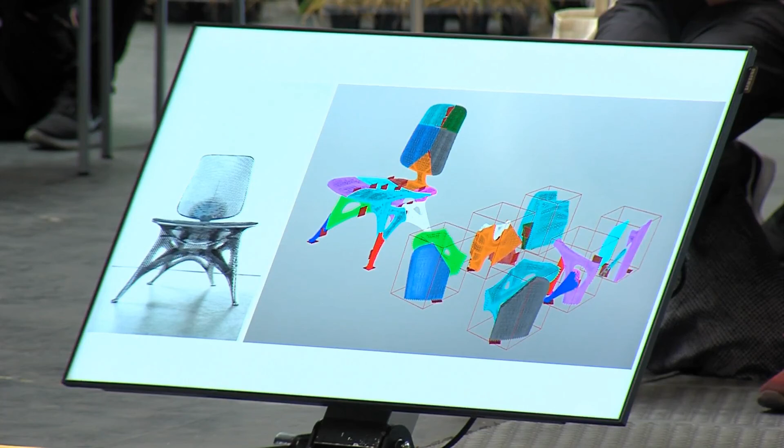And since we didn't find any 3D printing company that would help us develop a 3D printer big enough to print full-size furniture, we decided to take matters into our own hands. We bought an old retired robot from the car industry, and together with two students from university, we developed this machine. It's using a two-component, really fast curing resin to print lines almost in mid-air.

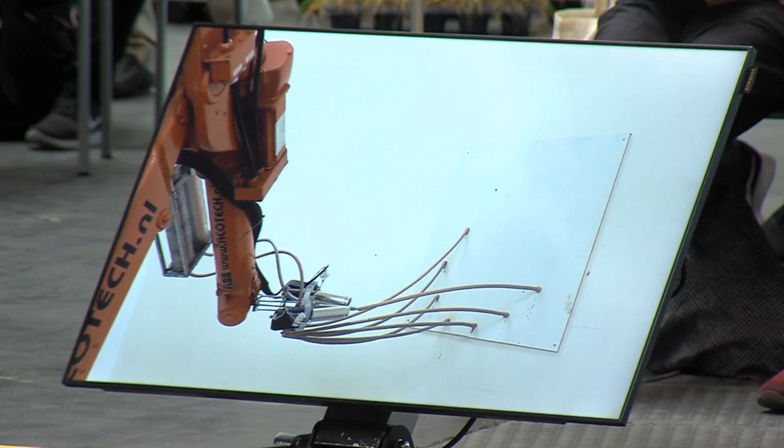We kind of liked this idea because you use six axes rather than the normal three axes of a printer, and this allows you to not just print inside a building volume, but also move outside of it and print parts and pieces of virtually unlimited size. Because if you're reaching the end of your building reach, you just move the robot and you can keep on printing.

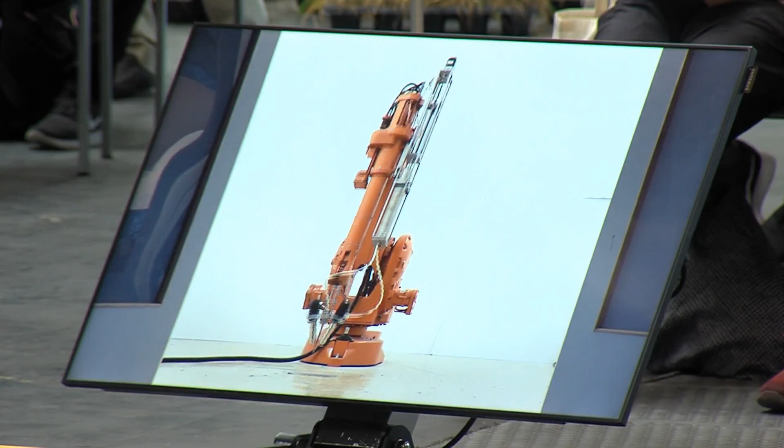However, this material wasn't really what we wanted. It's a really lightweight, brittle, not appealing material. So we thought, what if we would do the same with metal? What if we take a welding machine and attach that to the robot and start printing with this? Then suddenly we can make full-size steel objects.

Brilliant idea, we thought. We were dreaming about early retirement, but unfortunately we found this patent from 1925 of a guy who did exactly the same, using a welding technique to make decorative articles. But luckily he didn't have robots at the time and he didn't have a computer, so there was more than enough left for us to develop.

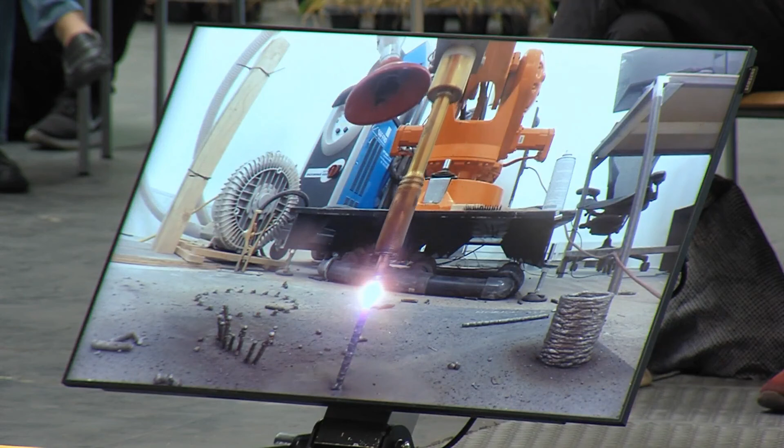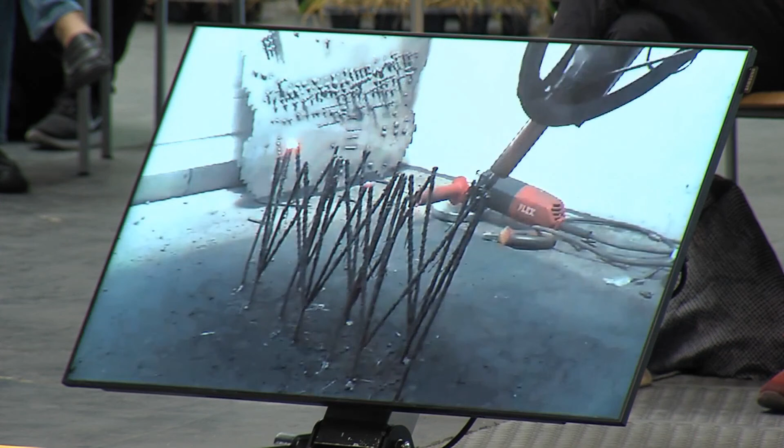So we started working on it, got better at it, printing simple lines, then more complex lines. At a certain point we could even print more complex structures. Of course, not everything went right - what you see here actually happened a few times. We set fire to the brooms in the workshop that were meant to keep a tidy workspace. But you need all those things to learn and get better at what you're doing.

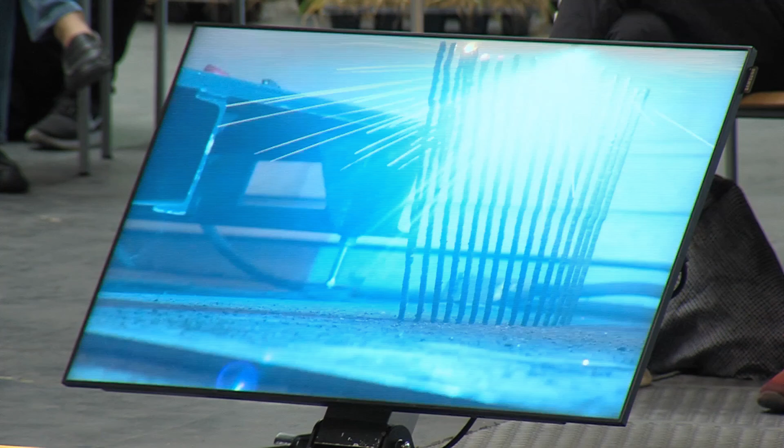Then at a certain point we felt confident enough to print actual pieces with it. This is also a Joris Laarman piece, called the Dragon Bench. We already made, I think, 7 or 8 of those. They're made out of stainless steel, and the cool thing is all of those are unique pieces - with 3D printing you don't need molds, so you can make one-of-a-kind pieces of everything.

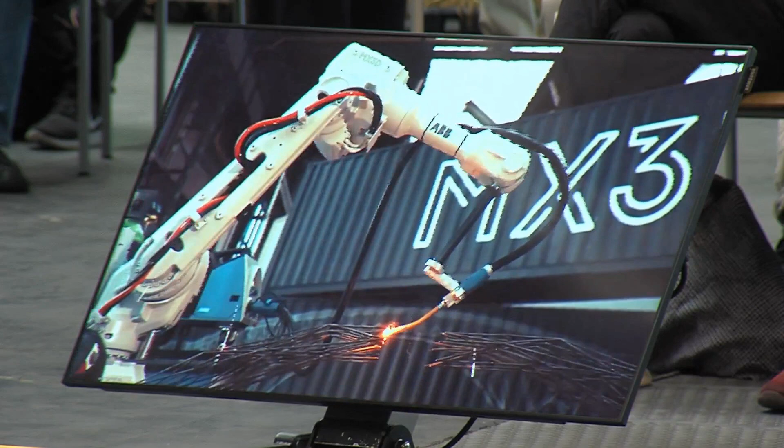But our ambitions rose a bit higher, and we thought, okay, what else can we do with this technique? By that time, we were on the radar of Autodesk, the software company in the US, and they invited us to San Francisco. The evening before the meeting, we were thinking, okay, we need to present something that's really going to blow their minds - something we can print that they're really going to like. Literally over a beer in our Airbnb garden, we came to the idea that it really had to become a bridge.

Because if you're printing a bridge, it means you need a mature 3D printing technique. You need good, strong material. You need a bigger size than just the small iPhone cases that are being printed most of the time. So it totally made sense - we are from Amsterdam, known for its bridges and canals, so it made sense to make a bridge.

But then we had the idea, they were enthusiastic about it, we were enthusiastic about it, and instantly we were worried about what we'd promised. We were like, okay, we're going to make a bridge.

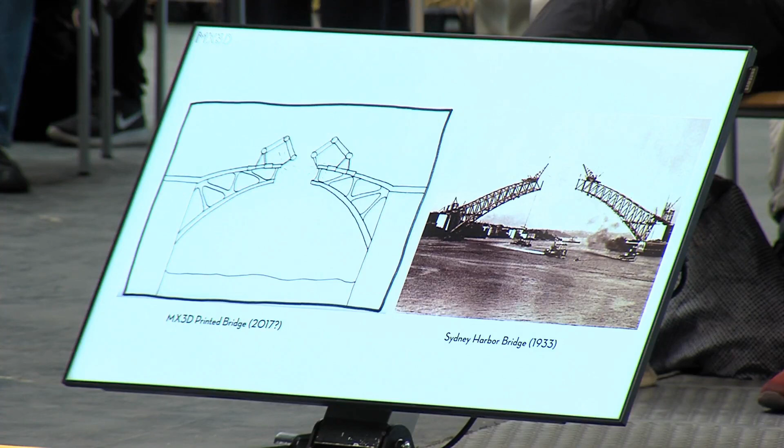So I spent a lot of time on this animation, and then I came to the studio to show it, and my colleague Gijs came up with this photo of the Sydney Harbour Bridge, really similar in design. What I really like is that in a way it's the same - that was also a very analog way of 3D printing, just moving metal to a different location. On the left it's really digital, and on the right it's a really analog way.

So, I'm not showing this because I have to from our sponsors, but because it really shows how many companies, how many people you need to do a project like this. And this list is not up to date anymore. It could be like twice as long. There's literally hundreds, maybe even thousands of people who worked with us to get this project actually working.

And the design also was quite a big challenge. First, we had some wild ideas of how we could print a bridge, because 3D printing allows you to print really complex shapes. So complexity is suddenly a completely different issue than it was before. But we found out that it's not just about what you want to print, but it's also about what you are allowed to do. A bridge is more than just something that's printed. It's a construction. There's regulations. There's many more things to it than just shape.

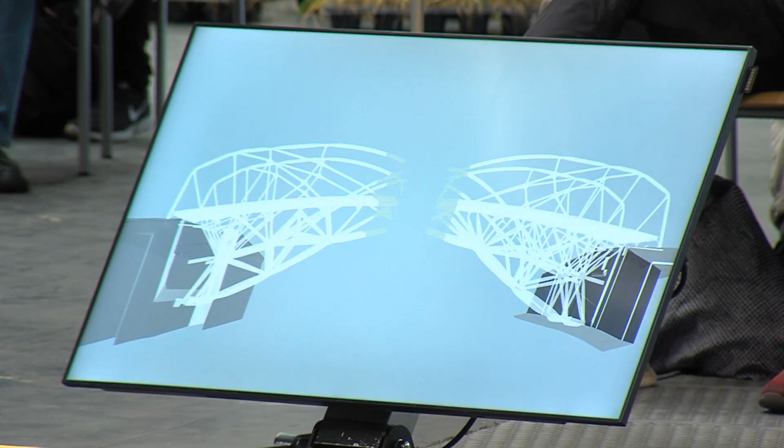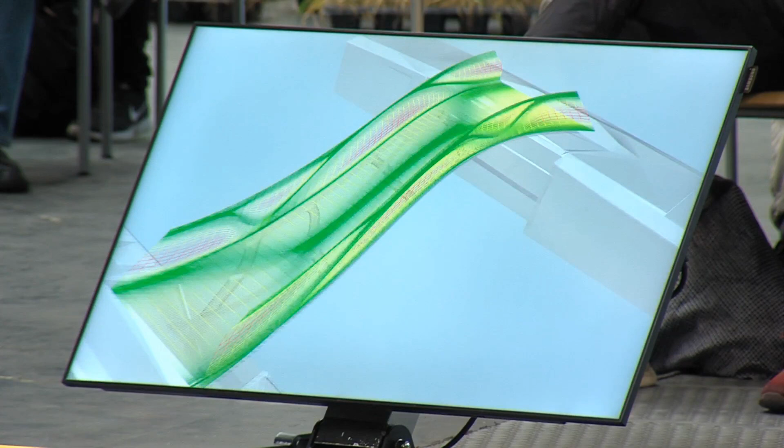So we started thinking about a good design for the bridge. A lot of ideas passed the review. And in the end, we chose this principle. An algorithm is calculating the stress lines within the bridge. And what we did was we translated those stress lines into more dense and more open areas in the bridge. And by that, it's getting more material and more strength and stiffness in the places where it needs to be. And in the end, that resulted in this design.

So if we look at the timeline, we started in 2015. Then we announced that we were going to make the bridge. Right now, we are September 2018. We are just about to finish the bridge. Actually, October 21st, that's the start of the Dutch Design Week in Eindhoven. And we are going to present the bridge there, so it has to be completely done. It's going to take quite a bit of work to get there, but I'm sure it's going to work.

And then afterwards, so this is what still needs to be done. We still have to print the swirls that are going to be attached. The bridge deck needs to be attached to it, and then by October, it'll be completely done. Hopefully, we will be able to place the bridge on the final location in 2019. If, that is, we get a permit for it. Because of course, people have to walk over it. Millions of people every year have to walk over it, so we need a permit for it.

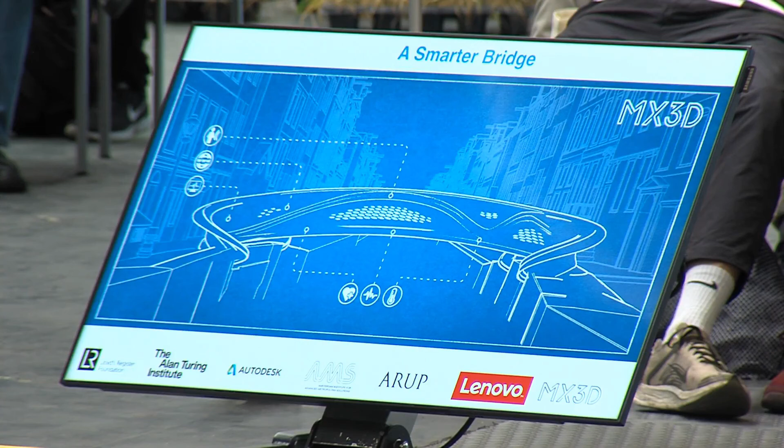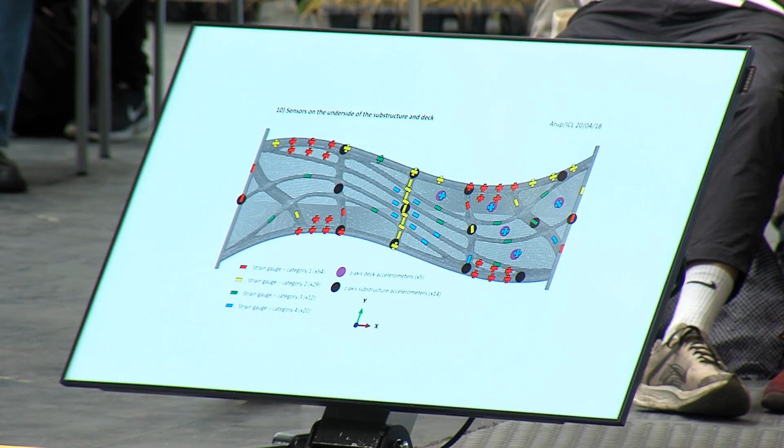So what we did was we are making a digital twin of the bridge. We made a scan that's all loaded into a computer algorithm, and we are sensoring up the bridge. So there's tons of sensors going to be on there that monitor every millimeter of movement of the bridge when people walk over it. The sensor system is for different reasons. It's also to monitor the traffic in the city of Amsterdam, but it's also for certifying the bridge, for proving that it's going to be strong enough.

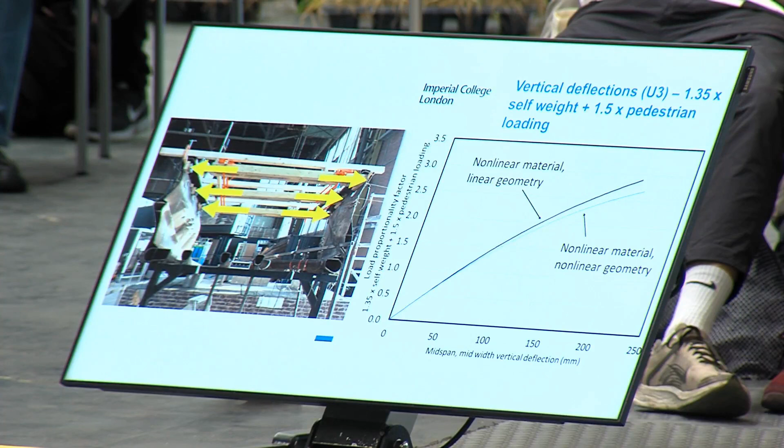And what we're also doing is full-scale tests. Coming month, we're going to put 10 tons of weight on the bridge, and then we're going to measure very accurately what the movement of the bridge is. And hopefully, by the end of September, we will be sure that the bridge is going to be strong enough to be placed in Amsterdam. So hopefully, in 2019, we will be able to place the bridge on its final location.

So that's basically my presentation. The only thing I want to add is that, especially with a project like this, there's always many reasons not to even start, because why would you print a bridge? It's a very complex thing to do, and it can be painstaking at times. So there's always hundreds of reasons not to do it, but we are always looking for the one reason actually to do it. And if you don't get started with it, you will never finish it. So that's basically what our experience with this project is.